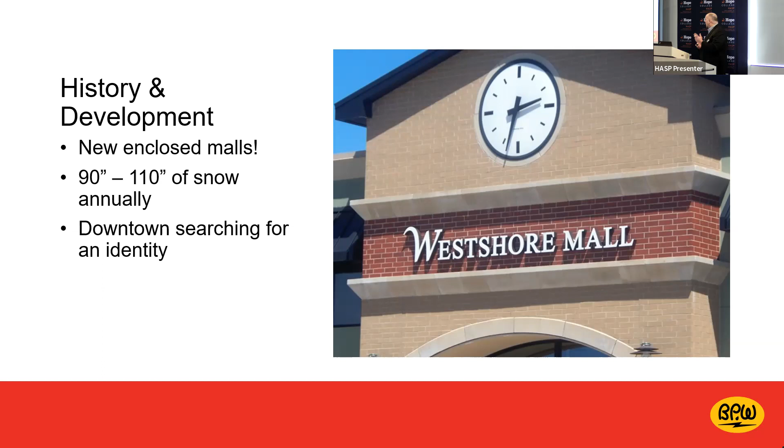So the concept that was born was streetscape at the time. Streetscape was really a whole revitalization of our downtown, trying to tie the architecture of our building fronts to some historic connection to our past, figuring out how to make downtown more of a destination in total. Amenities that people could enjoy, like benches and small areas of respite, little park areas carved in.

All of that was a vision created around that time, with some very important people at the Riverview Group. Gordon Van Wylen, obviously a very influential voice. City staff Greg Holcomb spent a lot of time working with the Riverview Group over the years. And a fellow by the name of Bill Johnson, still in our community, has done wonderful work helping to create vision for place making in our downtown, created this vision of streetscape.

To implement the vision, it was going to be about a $2.1 million investment to change the traffic flow, to create parking areas, to really just create this new vision of what our downtown could be.

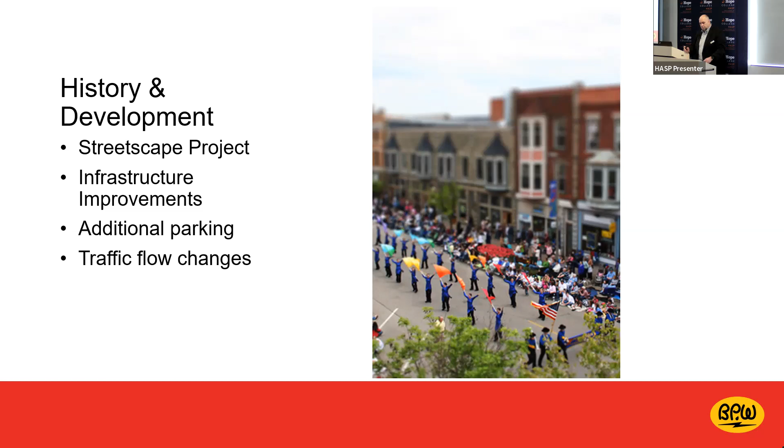Well, another influential voice at the Riverview Group was Ed Prince. And I think, how many of you know the name Ed Prince? I imagine all of you in the room probably would know the name. Ed Prince was a tremendously important business leader in our community, but also a philanthropic voice.

Put a lot of his own money into the community over the years to try to create a place. As a business owner, you want to make sure your workforce enjoys the community you're living in as well. So there's an investment there to make sure you can attract talent. So there was that, but also property holdings that the Prince family had were important to continue to revitalize that downtown.

Downtown. Ed Prince came up with the idea of Snowmelt. Really, this is the genesis of that, and it came from visits he had to Europe, some of the Scandinavian countries, where he saw this implemented at some scale, and thought what a wonderful enhancement to really differentiate, to separate Holland from other communities, to create that special thing that would set it apart.

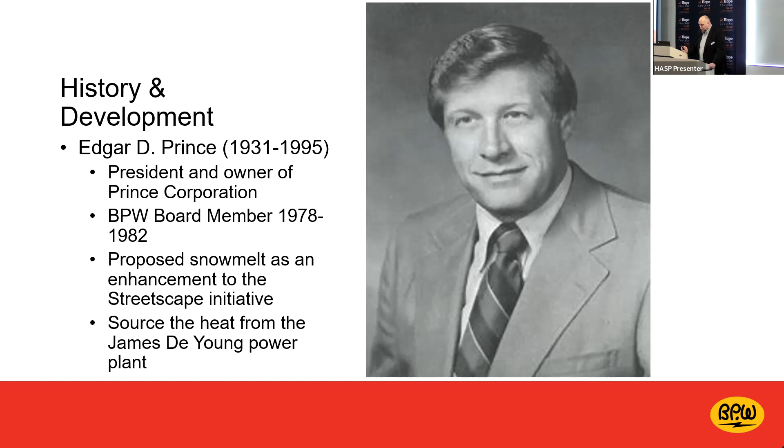And so he came back with this concept and met with the group, this Riverview Study Committee, and wanted to pose the idea. This committee had really been working on the implementation of streetscape for the last year. It formed in 1987, and now we're talking about March 1988. The reason streetscape hadn't moved forward yet is they were trying to figure out the assessment process to pay for about 70% of the streetscape work to the downtown property owners, and that hadn't been finalized yet.

And the city manager at the time, Terry Hoffmeyer, was involved in this concept of taking this effort and putting what was originally planned to be about a $550,000 estimate to build out Snowmelt and connect it to our James DeYoung power plant. The Holland Board of Public Works, over the years of its existence, has owned electric generation.

In 1938, we moved from an area over by Riverview Park, actually kind of where 6th Street and 5th Street are, down in that area. That was the original power plant back to the turn of the century in the early 1900s. We moved over to the James DeYoung site, and that whole area was reclaimed from swamp. A shoreline was created there, and the power plant was built. That was to be the source of some of the heat for the Snowmelt system.

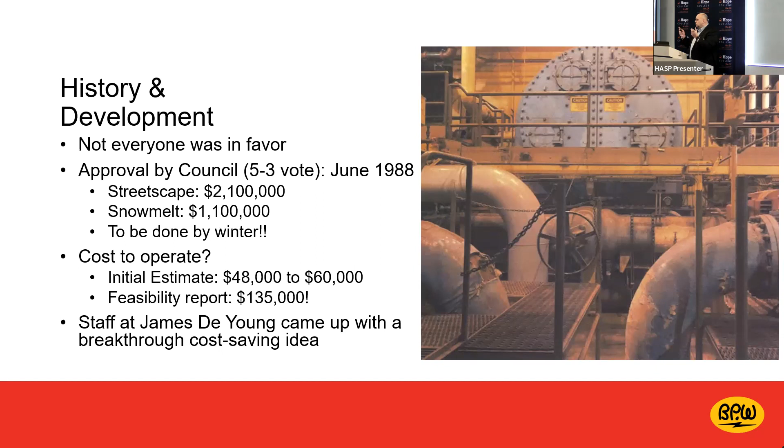But even better than that, we were going to take steam off from the process to a heat exchanger. Now we can let all that steam go through the steam turbine and come to the condenser before it's actually utilized, which actually improved the overall efficiency of the Snowmelt system too. That remembrance alone allowed us to move forward.

So again, the design of the system was set up so that lake water was brought in and warmed by the recirculation of that tunnel. Then we would pull it off the outlet of that condenser over to these pumps right here. These pumps would take the water through transmission lines, larger than this, this is a smaller version, but it's high density polyethylene pipe. So all down Pine Avenue there would be a feeding line down to 8th Street, and then a return line back to the power plant after it was done using the Snowmelt. That's how it would get downtown with about 93 degree water.

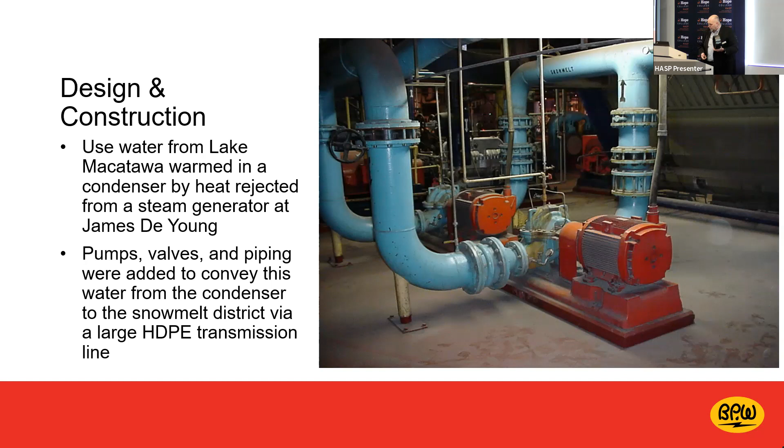And then if you look at what's going on inside of the street, you've got smaller tubes there. This is what's called the distribution system. Again, the initial project was going to be about 3 blocks, a little over 3 blocks. It was going to run storefront to storefront, so it would include the sidewalks and the streets. These tubes were actually to be spaced out. There's a company called Wirsbo, they are a division, or their product is within a company called Uponor.

And they actually build these things for private use, for commercial use, for different types of temperatures going into the system. They have a booklet that says, if you want to get the temperature of the street or surface up to a certain level under a certain design condition for ambient temperature and wind, here's what you need. You need a certain amount of flow through the tubes, the tubes need to be a certain size, and they need to be spaced a certain amount apart.

So we did that with the 1-inch tubing that you see here. It's basically like PEX tubing almost, and it's spaced at 6 inches apart. That gets you about 90 British thermal units—a measurement of energy—about 90 BTUs per square foot per hour of heat exchange.

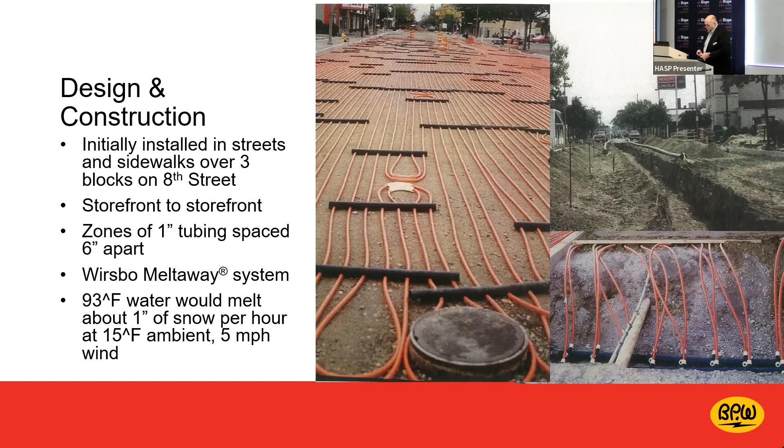So that was the design. Now we get into the construction. Construction began right after a celebration on June 20, 1988. It was originally planned to be coordinated phase by phase—they wanted the least disruption to the businesses downtown as possible.

So it was going to be done block by block, layered, where the BPW would go in and replace the sewer main and water main, then the city would do work with storm sewers and things like that, and then the snowmelt system would be layered in on top of that. Well, that didn't go as planned.

As it turned out, because of various delays, one thing we found was that when we unearthed some of the sidewalks, we found old coal vaults that were there from when these buildings used to be heated by coal. They would actually store coal on site, and those vaults all had to be filled in. That caused some delays—there were things that caused delays.

So what happened in reality is we had all 3.5 blocks torn up at the same time, and there were delays happening. At the same time, the mall was opening, and there was a quarter-mile-long backup of traffic in the northbound lane of US 31 trying to get into the mall.

From Andy Mulder's discussions, again with Jim Tierman—it was Tierman's store downtown—this was the worst period during the history of the operation of the store, because you're messing with people's shopping patterns, with what they're accustomed to. At the time, people had to find back doors and navigate around areas of construction to get in. It was terribly challenging. It took 3 years for people to get back to the volume of traffic into the store compared to what they had prior to the work being done.

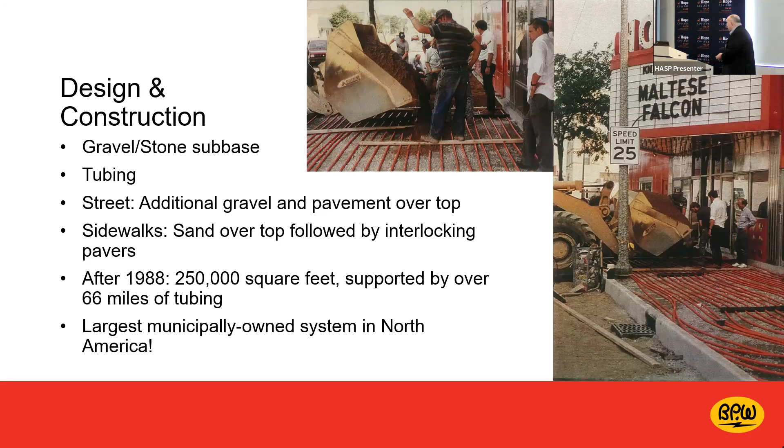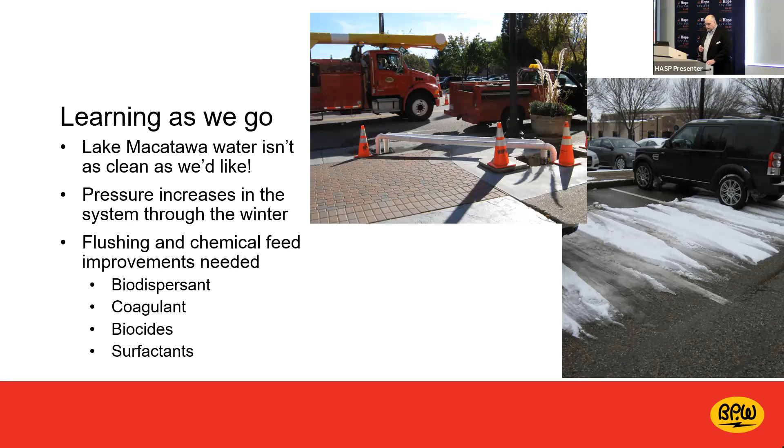Well, yeah, I remember at the power plant some of the early years, right, that you're operating this thing.

The other constraint is that the heat source is unit number 3, a generator built back in 1953. So even when the Snowmelt system was just getting started, that plant was already 35 years old and getting older. What typically happens in a power plant is that there are times you have to take it down periodically for maintenance. There are also unexpected things, like a tube leak in a boiler, where you can't continue to let it operate that way, so you have to take it down.

I remember that often, especially in the early years, the news crews loved to come out and say, why isn't Snowmelt working? Snowmelt's broken. Holland must have made a bad decision or something. They're looking for sensationalism out of that. And really what was going on wasn't the Snowmelt system, it was the heat source at the De Young plant, where maybe the unit was down for some reason. So we at the power plant kind of wanted to change the way people looked at us, from being an electric generator to being a snow melting machine that happened to also produce electricity. We quickly found out the relative importance of what the power plant was doing.

Well, in 2004, again, this was so well liked that there was a request to do some additional expansion work here. One of the things in play was that the generator we were rejecting heat from had a certain size to it, about an 11 megawatt generator, which meant there was a certain amount of heat available for it to give off. That meant the Snowmelt system couldn't grow too big without using up all of the capacity.

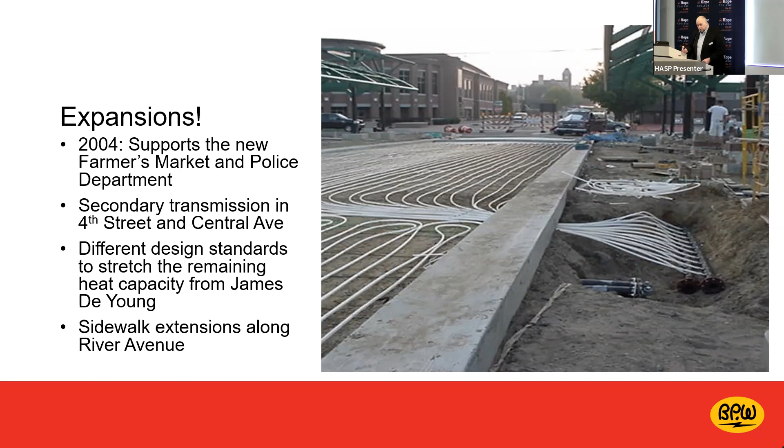That allowed us to not only go to the farmers market area, but to push out further for sidewalks down the rest of the way to Columbia, and eventually around to the parking garage on 7th Street, and also to connect down to the City Hall area and the library down River Avenue for some sidewalks. All of that was added in 2004.

And the city said, guess what, we don't have as much cash around as we would like. So BPW, since you're already providing the energy to us, and there's a fee for that energy—I'll get into discussing how that works in a little bit—they said, can we add another element where you will fund the transmission lines? The transmission lines are everything up to those manifolds, so where the valves going into those manifolds are, that's all transmission line. Will you fund that? Then on the rate we pay you, we'll have a capital recovery mechanism, so we'll pay you back over time, and that'll get put into the Snowmelt system charge.

And I'll talk a little bit about how it's paid for here in a little bit. The BPW agreed to that, so the BPW shifted ownership over for the transmission lines at that time.

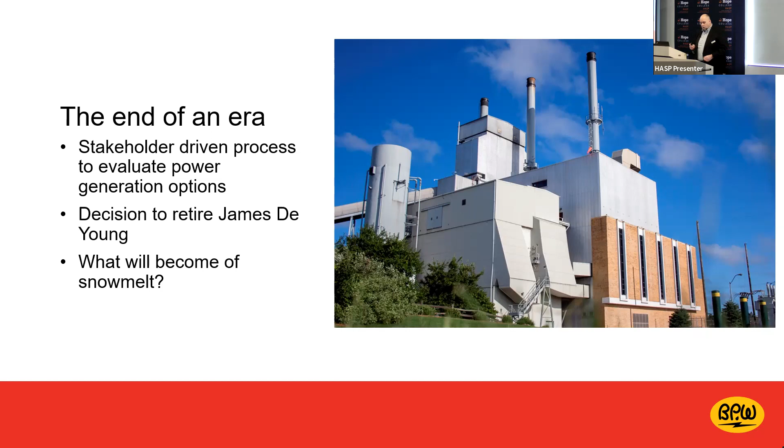But what are we going to do? Because now we have a new power plant being built, and it's not going to be on the water, so we're not going to be using Lake Macatawa water anymore. That's great, because now we don't have to worry about some of these sediment issues and plant growth issues and all that. But we have a system that's run on that lake water for about 30 years or so.

So we had to clean. In the summer of 2016, a tremendous amount of flushing was going on. Additionally, we found that 30-year-old valves that hadn't been exercised in a long time started to have some problems, so we did a lot of valve replacement out there in the system as well. So we got ready for that.

And we were excited because we could integrate Snowmelt up front instead of having it be an afterthought and having to figure out how to get it integrated. We could build it with that in mind, which also meant we could build some backups to it. At our power plant, we now not only have the same sort of process of rejecting heat from a steam turbine generator, but when it's not operating, we have a backup boiler that's there that can provide steam to a heat exchanger, not too dissimilar to other concepts used in other communities where there isn't a power plant. It doesn't have to do that very often because the plant's been very reliable, but we did build that in. We pushed to get Snowmelt done.

The project for building Holland Energy Park was getting delayed a little bit. We were getting nervous because snow's coming. Fortunately, the auxiliary boiler and the pumps to serve that, and the interconnecting lines to serve that, were done on December 5, 2016. Holland's first measurable snow was December 6, 2016. Nobody knew anything different until I'm telling you today.

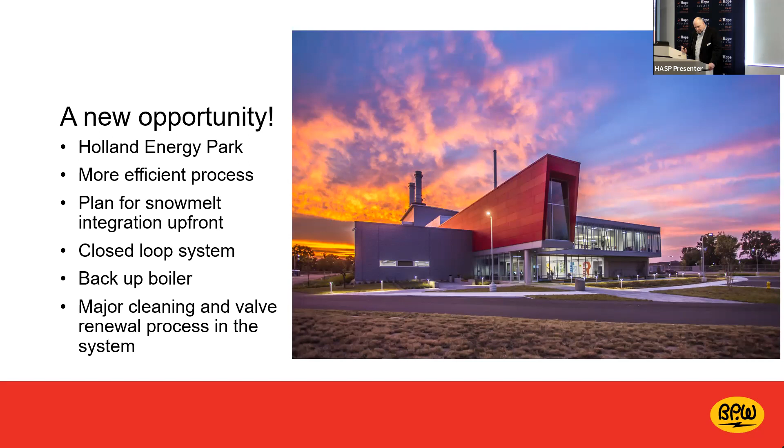Making the transition to Holland Energy Park was no small endeavor. These are 36-inch high density polyethylene lines coming out of the Holland Energy Park. The device on the side with that collar is what fuses high density polyethylene pipe together—it's actually heat welded. It melts it and pushes it together to form a solid joint, and when it cools it basically has the same properties.

That's a very thick wall pipe. You can see the one sticking through the sleeve, because again we had to build underneath railroads. As discussed earlier, we had to put in a steel casing that would allow us to sleeve the high density polyethylene through that area to give it additional strength. This was done at a cost of about $4.2 million.

It was partly the decision of the BPW to move the plant to the location it was, which made sense for us from a fuel supply perspective. It would have been tough to bring a high pressure gas line all the way to the old De Young plant. So part of that decision making, which caused this, was on the BPW.

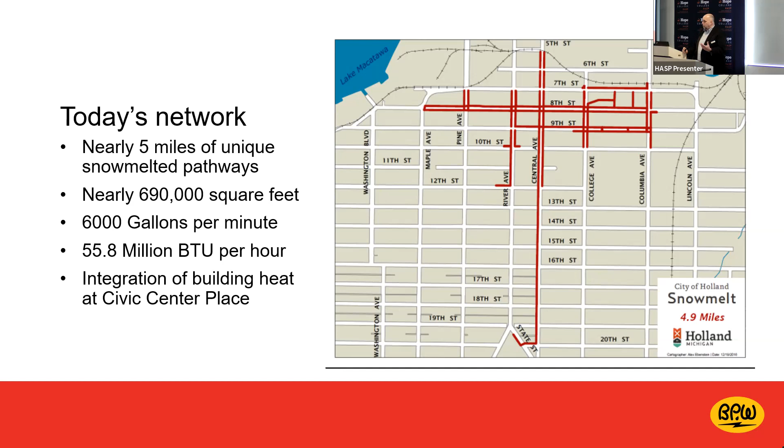So let's talk about how this works. I'm going to geek out here a little bit on you, so just want to cover everything.

All right, so I'll just come over here so I can talk about it a little bit.

Holland Energy Park is what's called a natural gas combined cycle plant. At the front end, there are large jet engines, basically - pretty much the same thing that hangs underneath the wing of an aircraft. They're called combustion turbines in the electric generation world, and they compress air coming in. Then after the air is compressed, fuel is introduced in these nozzles and burned in that location.

That combination of pressurized combustion gives energy to a set of blades that do two things: they drive the compressor on the front end, so something has to provide that power, but then also at the very front is a generator. That generator is producing electricity, connected to the grid. So the turbine area is really providing enough power to power all that.

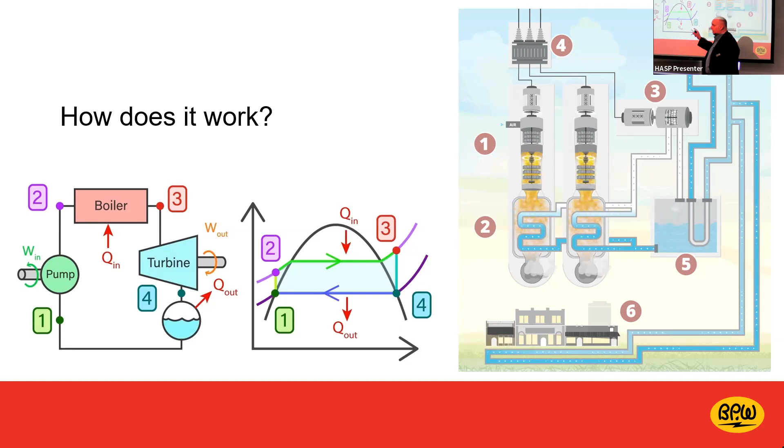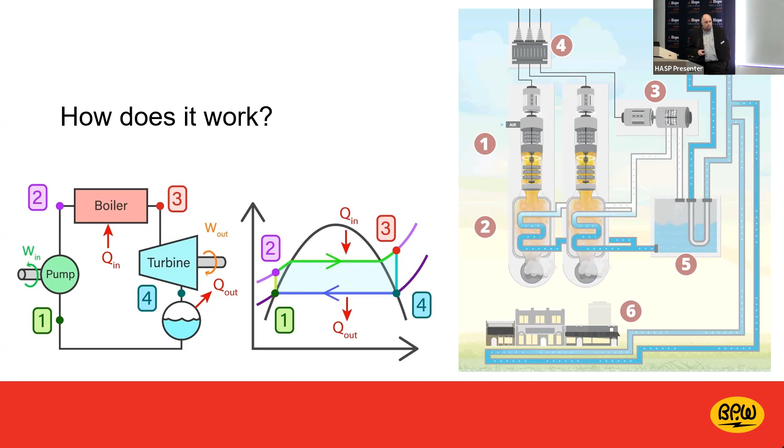In other communities, we don't have this, right? The idea here is that in other private uses, in other communities, you have a boiler that actually just produces the steam or hot water for a snowmelt system - you're directly firing natural gas or some fuel to do that, which is very expensive from an operating standpoint. Here, we're using the waste heat, so we're getting a lot more out of that.

How many of you have been to Holland Energy Park? Oh, that's wonderful. I encourage more of you to go to that.

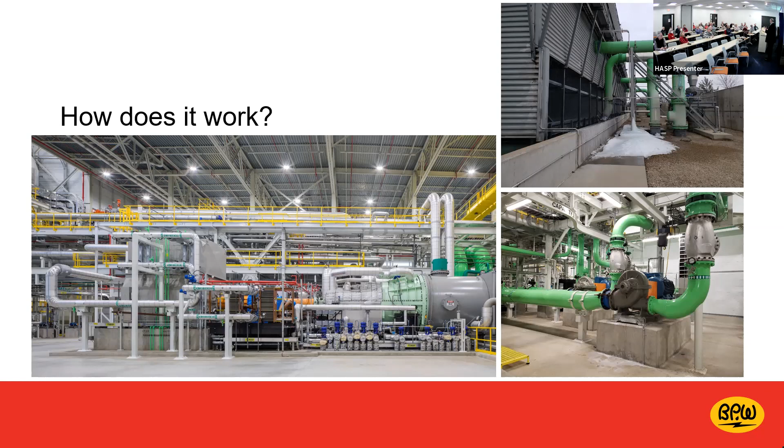And down at the bottom of that is a high efficient screen that's there, because we cleaned out the system and flushed it as much as possible, but we wanted to make sure we got all the impurities out. So when the plant was built, we put the screen on there so we could continue to clean the water as it flushed through the system. And we were able to do that.

Here is the auxiliary boiler that stands as a backup. And then again, our exhibitry in the visitor center, we created an exhibit for the snowmelt to demonstrate it.

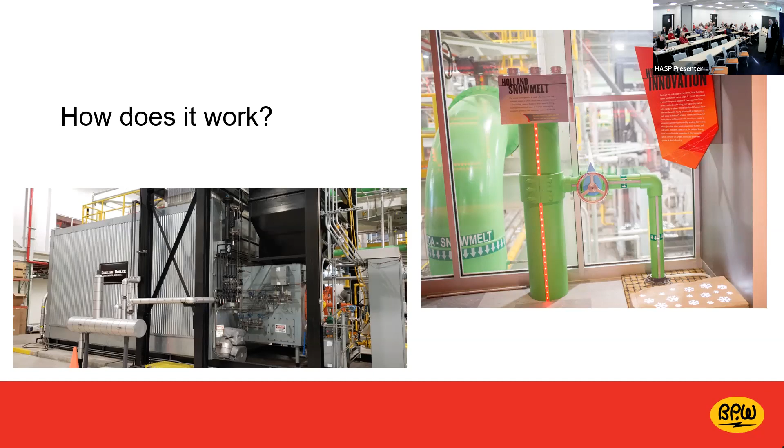That's the line that will leave the power plant with 95-degree water, the actual line that connects in with the high-density polyethylene lines that you see under the areas I was showing with that major excavation going on. That exhibit allows you to divert the energy from the cooling tower to the streets and sidewalks and watch the snow on it actually go away. Kind of a cool way of demonstrating that.

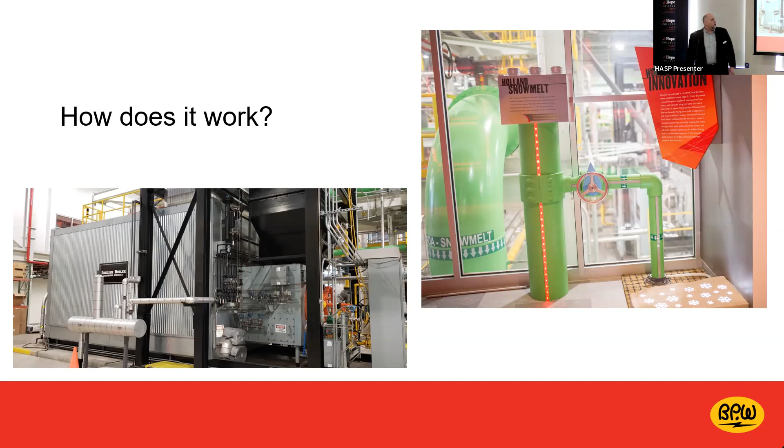Also, it's fun that we've been innovating over the years. I don't know if any of you have heard of smart bricks before. Anybody hear of that term?

So smart bricks were the idea of Pete Hoffswell. Pete is actually in charge of our broadband department, but works a lot with different groups, innovation groups, kids working on things, the Lakeshore Makers Group. Pete came up with a prototype for a smart brick, kind of started with trying to measure the performance of the snowmelt system out in the field. So we have an idea what it leaves at, what it comes back at, and we can visually see whether the snow is accumulating or not.

But we really didn't have good surveillance of what the temperatures were out in various parts of the system. So we wanted to create this idea of having these things embedded out there in a way that allowed us to see that. Pete's gone through some evolutions of this. He received the Innovator of the Year award from Grand Valley State University for this. And some examples of it now that we have.

It's kind of a cool one here where we're actually going to put this one right in place of one of the pavers that were there. This is like a 3D printed model of it. But essentially what it has is a device that you can drill into the brick, maybe about an inch below the surface, and it will read the temperature of that brick at that location, and come back to a low voltage transmitter.

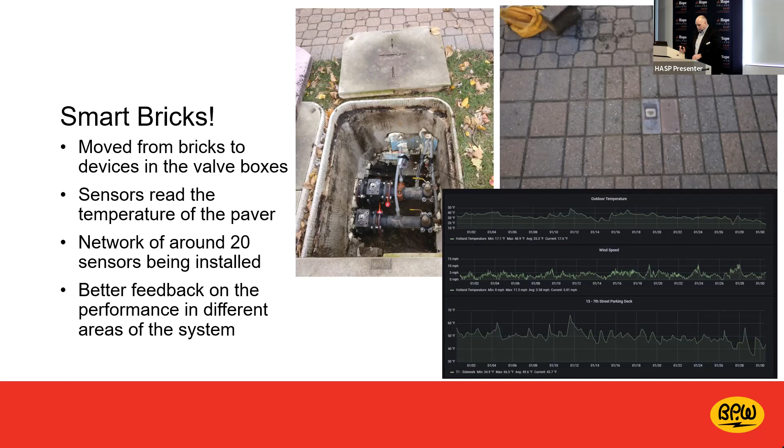So what are some of the benefits? Obviously increased walkability. We have people jogging and walking down there all the time. It's a great place to bring pets that have sensitive pads, avoiding salt. It extends the life of things too, with no freeze-thaw, so the pavers and asphalt last a long time.

I didn't really think about this, but a lot of decorative lighting fixtures down there, if they're not getting hit by salt, you're not eating away at the metal in those bases, so they last a long time. All these things contribute to bringing people down there as a destination, and it helps the merchants downtown continue to be a place people want to shop. It creates a wonderful environment, different from malls where you're inside.

The malls have sort of gone the other way. We see that the West Shore Mall isn't the West Shore Mall anymore, it's Grand Rapids Community College and other things. Yes, there are some stores still there, but it's not the experience people have gravitated toward. This continues to be a very active place as a destination.

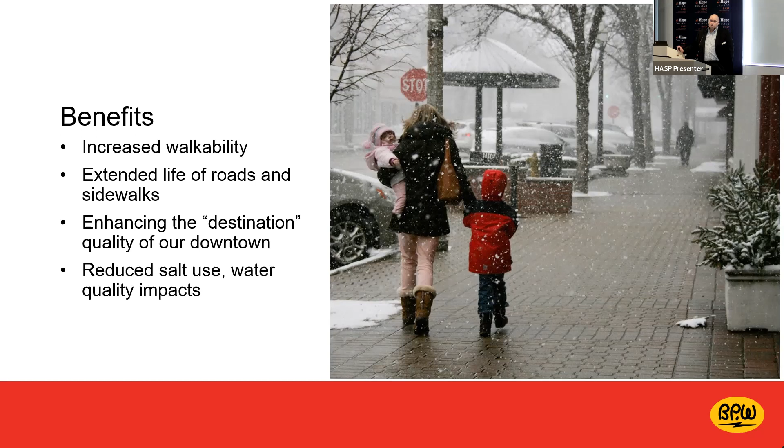Reduced salt is also a better benefit in terms of water impacts, and the porous surfaces help with stormwater runoff. We've received a lot of recognition for this.

The Weather Channel was here back in 2019, and also during the blizzard that occurred in 2020 — that's an individual out at the state park during the blizzard, not downtown. They interviewed the mayor and spent time downtown too, and were very impressed given the extreme conditions with how well the city did, as well as the snowmelt system, which didn't perform great during the blizzard because we were dealing with 40-50 mile an hour winds and heavy snowfall rates, but it recovered very quickly — within a day or two after the blizzard, the streets were back to clear.

Runner's World also focused a story on Holland and all the jogging activity going on, back in February 2021. So a lot of notoriety comes with that, and we get a lot of inquiries from other communities asking how they can do this too. It's easy — all you've got to do is build a $240 million power plant and you're all set. That kind of shuts them down.

But we've heard from different communities, Canada, overseas. There are other places this exists — I mentioned Scandinavia, Helsinki, some areas in Copenhagen, Reykjavik. There are some areas, I think some of them might rival our size in total, but it's pretty darn close.

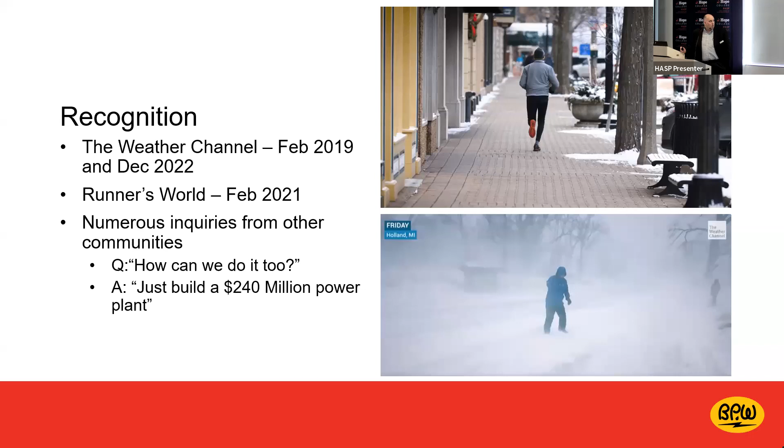In North America, I know we have everybody beat as far as that goes. Okay, so it's all great and everything like that, right? But how do we pay for it?

It's really a couple of different pieces and parts to that. One is the manifolds and looped tubes, the distribution area. When those go in, there's a contribution made, 50% to the construction of those distribution loops by the property owner in front of those. And if you're a not-for-profit, because you're not otherwise paying taxes to the city, or you're a tax-exempt entity, you may have a situation where you're now 60% responsible for it and the city's 40% responsible. So that is policy that has been created on that assessment district.

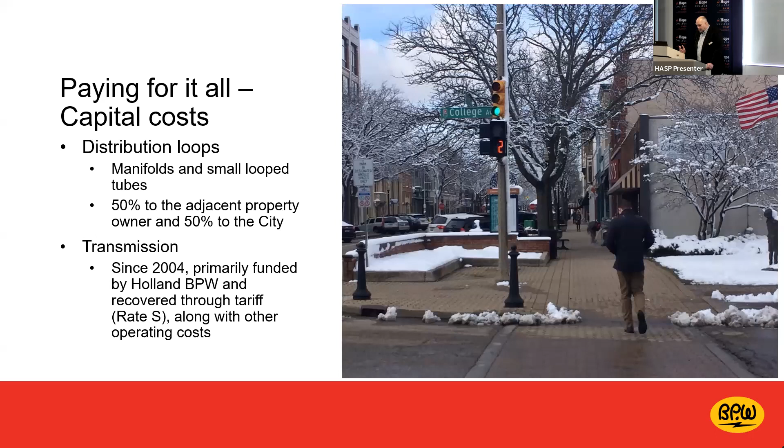Then the transmission segments, since 2004 the BPW has funded that, and then there's a cost recovery. The BPW charges the city. We do not just pay for it. We charge for the cost recovery on the investments made in the transmission, but we also charge for the operating costs of the system as well.

Under the expenses side, you can see some of those. Pumping cost takes energy to pump, so we actually charge an electric rate, energy and demand for that. So when the pumps are standing by, they're still paying for some of that demand. That's about $28,000 a year.

Chemicals, the suite of chemicals we're still doing for anti-scalant and disinfection, those are about $15,000 a year. And then there's periodic maintenance and things like that. The large portion of the expenses is actually capital recovery, about $313,000 a year to pay for an annual payment to recover those big investments that were made in transmission.

On the revenue side for the operating assessment, there's some contribution from the city street fund because the city avoids plowing it and avoids some maintenance activities. But then there's the assessment given to everybody that's in front of those particular areas on an annual basis for the operating, and that's 51 cents per square foot.

It used to be per linear foot back when sidewalks were fairly uniform. Well, a lot has changed with the design of different areas of the city where there's bigger areas, smaller areas. We have the Performing Arts Center, which has a major area that's snowmelted. We have parking lots now that are in the assessment. So linear feet didn't really make sense anymore, so they went to the 51 cents per square foot.

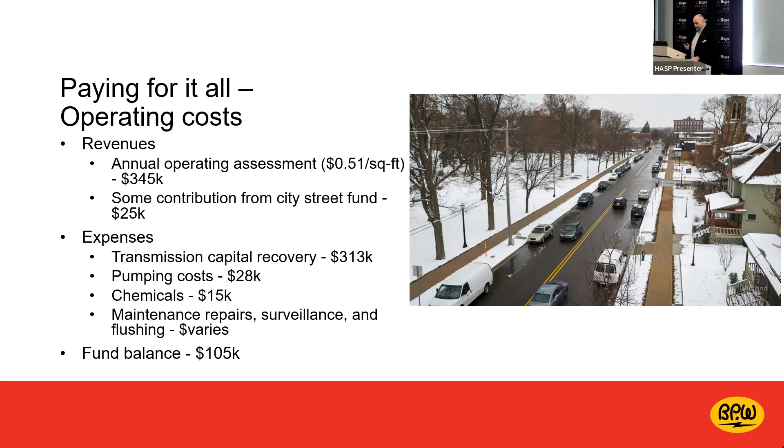So what is next? We have some more heat available. And again, the city kind of landed on, remember I mentioned it went from 90 BTUs per square foot in the original design to 65. We kind of landed on 80 now as the design basis, 80 BTUs per square foot per hour.

What's happening now in the near future is that unit number 6, an old combustion turbine we had back from 1974 that burned oil, was used very infrequently. Well, it's reached the end of life, and we're actually pulling that out here at the end of May of this year. And that is the area where the ice skating venue is going to be going in.

6th Street is going to get a whole new streetscape of its own over the next couple of years. There'll be renewal of that, undergrounding of utilities that are overhead, improvement of the street and gutter and the configuration of the road. There are plans long-term to extend College Avenue to the north and actually have it tie in with 5th and then 4th Street to kind of plat those streets in.

And the ice skating venue, so 6th Street will be getting some snowmelt sidewalks and street, up to probably the railroad crossing that's there. And then I don't know if the street's getting it on the other side, but maybe some sidewalk on the other side, coming in from the other area off from Central.

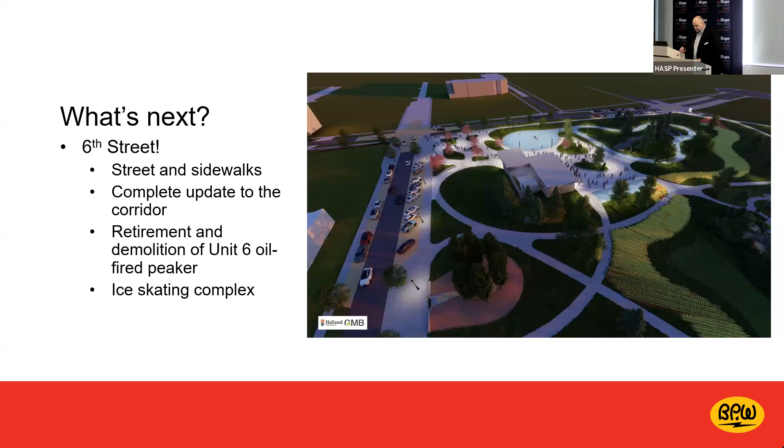So some big future considerations though. I mentioned it takes a power plant. What if in the effort to decarbonize our portfolio, we moved away from coal to natural gas, much cleaner. We continue to put renewables in our portfolio through wind and solar, but wind and solar don't generate waste heat for melting snow.

So it takes a rejection in that thermodynamic cycle that I talked about to be able to do that. How do we do that in a situation where we're decarbonizing? Well, fortunately, I don't think that we'll have to strand the asset of snowmelt.

I hope not. I think if we did, it'd be a long time out. But the other hope would be that other fuels become available for Holland Energy Park.

Hydrogen, for example, is being considered to be explored as an alternative to natural gas. And if hydrogen holds the key potentially to being able to continue to run Holland Energy Park, well then we have a long life available for burning something that rejects heat.

The other possibility is that there continues to be efforts on development of a much safer, smaller, more easily deployed nuclear technology called small modular reactors. In fact, the first small modular reactor prototypes have been approved to be installed out west, actually in Idaho. And so you'll see more of that come around.

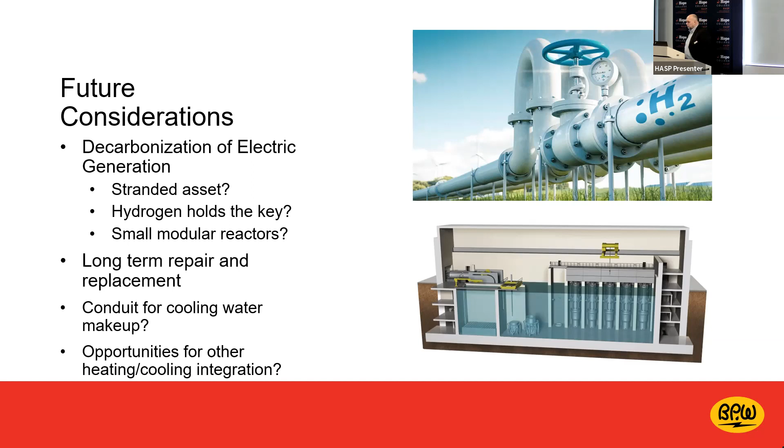It was rocket science to us. We didn't know anything about it. It had never been done before in the United States. We had no idea, number one, how it worked when we hooked it up to our power plant. We had no idea how much it was going to cost to create. And the biggest question was, how much was it going to cost to operate and maintain it?

The majority, and it was a slim majority, city council said, let's dare to dream big and let's give it a shot. And that sort of sums up the whole journey that we've been on with things in Holland in general, but specifically the Snowmelt system. So that is it, and I'd be happy to take any questions you have on this or anything else BPW related. Thank you very much.

I have one question. Can you hear me? Where are you at? Over here? I heard somebody with a question. Yeah, I'm on Zoom. Okay, very good, yes I can hear you.

I love the presentation. I had heard it maybe 4 or 5 years ago, but you've really upgraded it, and I learned a lot. One question that wasn't answered then and still seems to be the elephant in the room today: what is going to happen to the old power plant, particularly in light of your suggestions that there's going to be waterfront development? Is that the area where the development will be?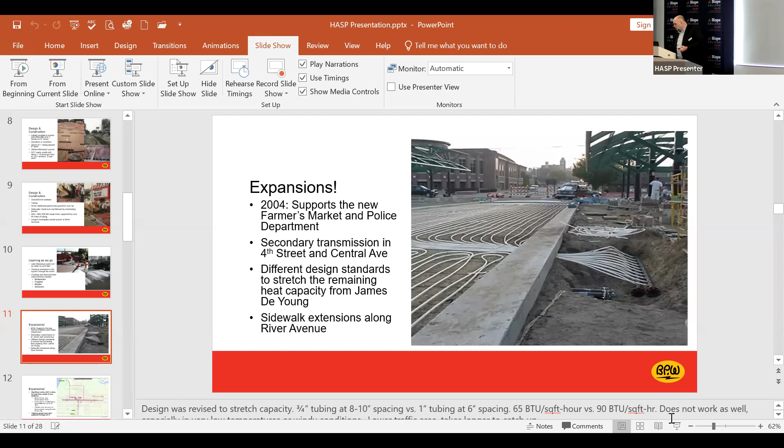So one going out, and then the loop comes back to the separate one, and it runs right along with it. That's also, if you look at the picture here of the new system that was put in for Holland Energy Park, same thing there. One of them is the supply, and the other one is the return going back on the much larger piping.

Is there a cost savings to those businesses connecting their boilers? Yes, because right now they're firing a boiler and burning fuel directly to heat the sidewalks, where this uses waste heat instead. They're paying for the assessment, which is about 51 cents per square foot. So if you have a sidewalk about 10 feet wide, and a storefront about 50 or 60 feet, that's about 600 square feet, so it's around $300 of assessment over a year.

If you operate a boiler, you have to maintain it and fire it with fuel - all those different things now go away. The fuel itself, if you think about having to burn that gas just to provide heat that's dissipating in the sidewalks, it's a lot of fuel being burned.

So we found that if we had to shut down the power plant and put a boiler in to create 51 million BTUs per hour, natural gas right now is about $4 on the open market per million BTU. So to operate the system, you're talking about $200 to $300 an hour just on energy usage. You multiply that by 24 hours a day throughout the season, and you really start adding up those numbers.